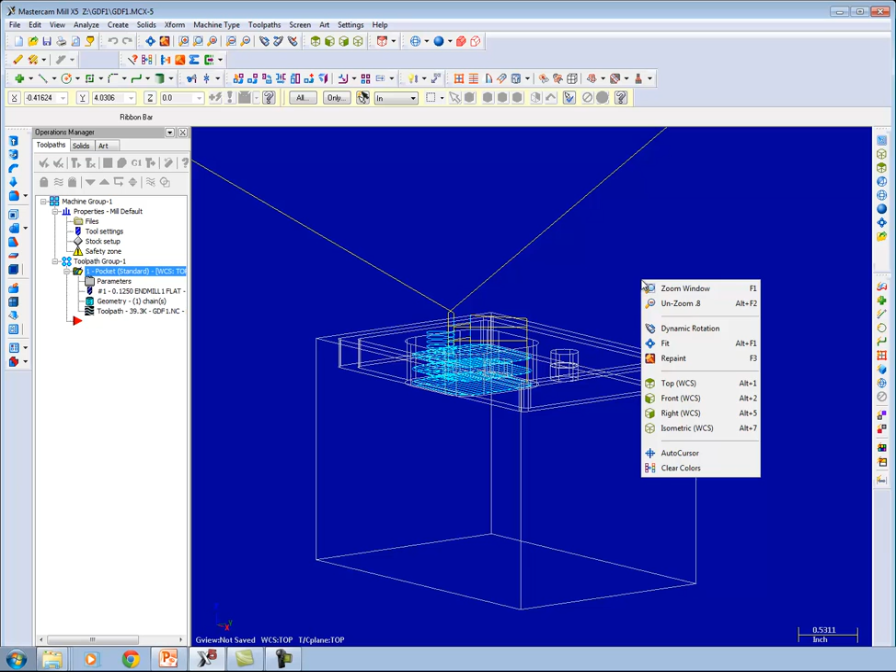Now that we've got our toolpath for our pocket, we can kind of take a look at it in a little more detail. So if I right click and do an isometric, I can see it, and again it comes in from the left, uses the helix to come in, and then does the back and forth with the pocket. It'll end up doing a cleanup step at the end, and then it'll go out toward the back.

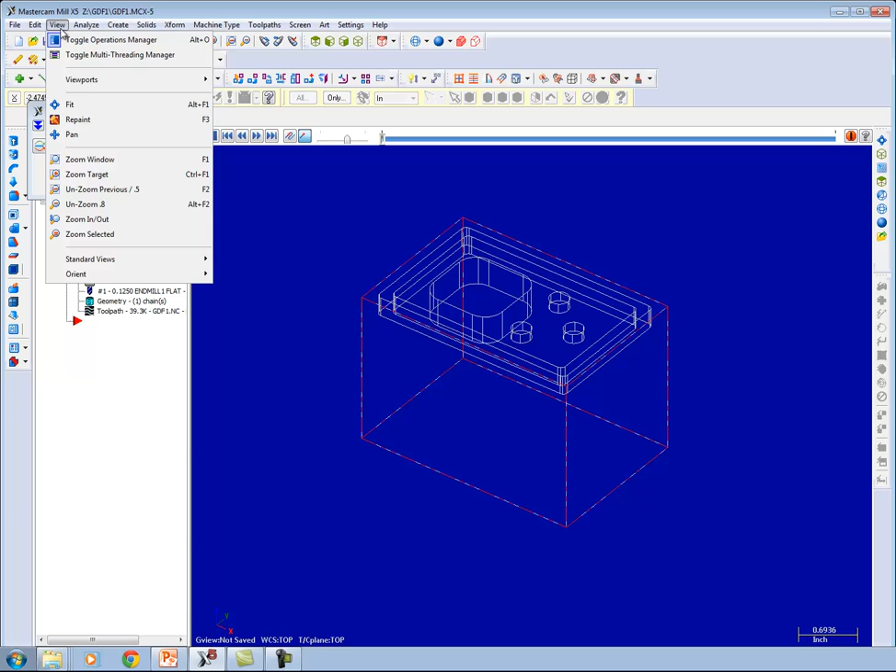Okay, one thing we would do now is do what's called a back plot. So that button is right here, back plot. So when I click that, it's going to give us a little animated cartoon, so to speak, of, oops, that's not what I wanted. What I wanted was pan. I'll put it out over here.

Okay. And when I press the button up here, so these are a lot of choices where then you can see the end mill present, and we're going to choose that for sure. And let's just watch to see what happens. Make it a little smaller. And again, move it out over here. And so let's play the movie.

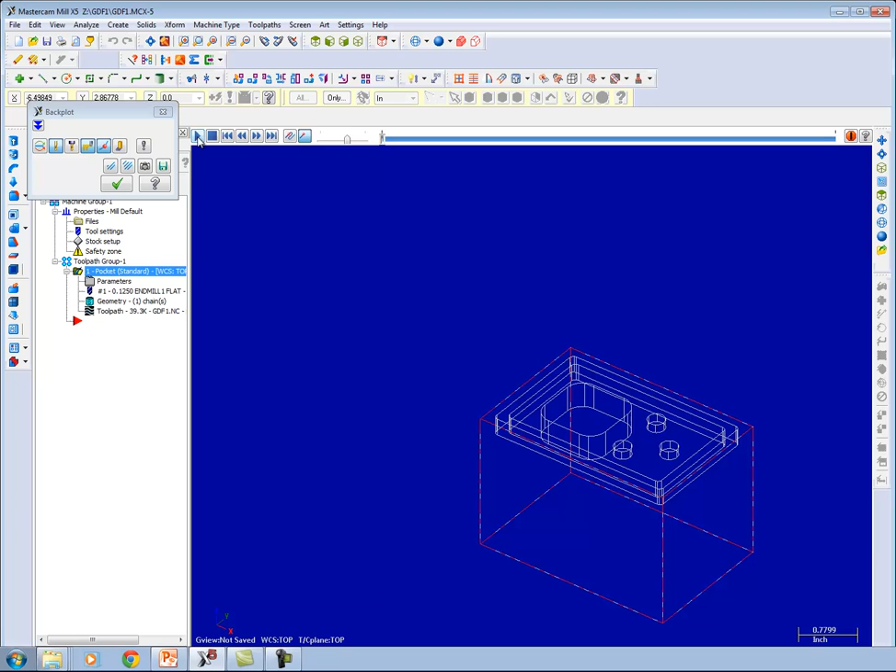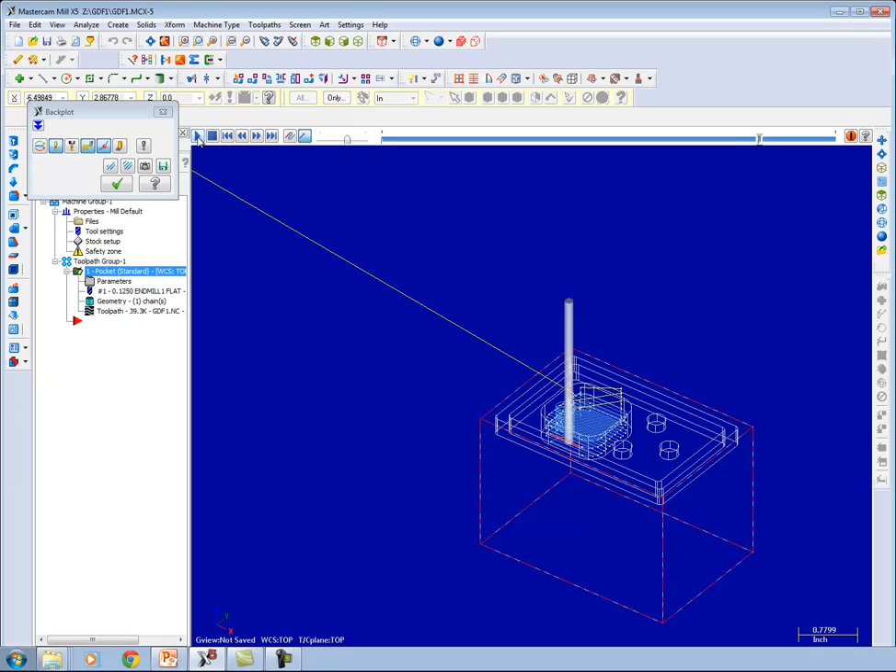And it comes, does its helices back and forth at 1/8 of an inch deep. And it comes out, helices in again. Another 1/8 of an inch. Now we're 2/8, I guess. And finally 3/8. And we come in, and then the final cleanup of the edge, because that edge will be scalloped. And you can see that it looks like this after that back plot.

And if I go, I believe, the top, it should show us that, again, the way we've got things set up, this will help us orient ourselves with respect to the part and also the milling machine. We come in from the left. This was, I believe, -5 at a height of 2, z equals 2. We come in, we take care of business, and then we come out at an x value of 0 and a y value of 5.

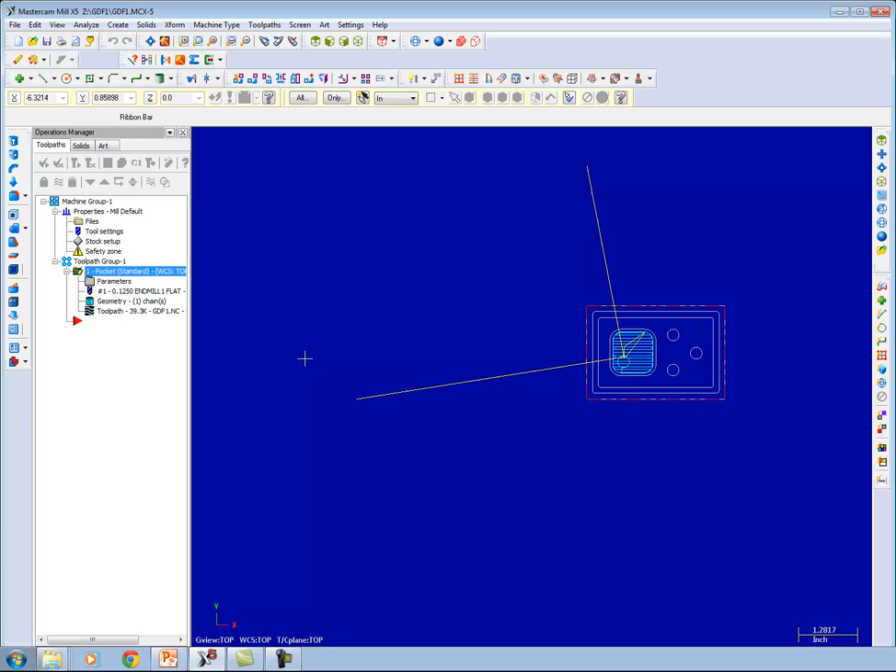Okay. So I think I'm okay. I'm happy with that. So I'm going to right-click isometric. And now I'm going to do the final step, which is called verify. And this is the one that will actually give us, I suppose, the most realistic cartoon. And we always want to do this before we actually take it to the milling machine. So pretty much the defaults will take care of everything.

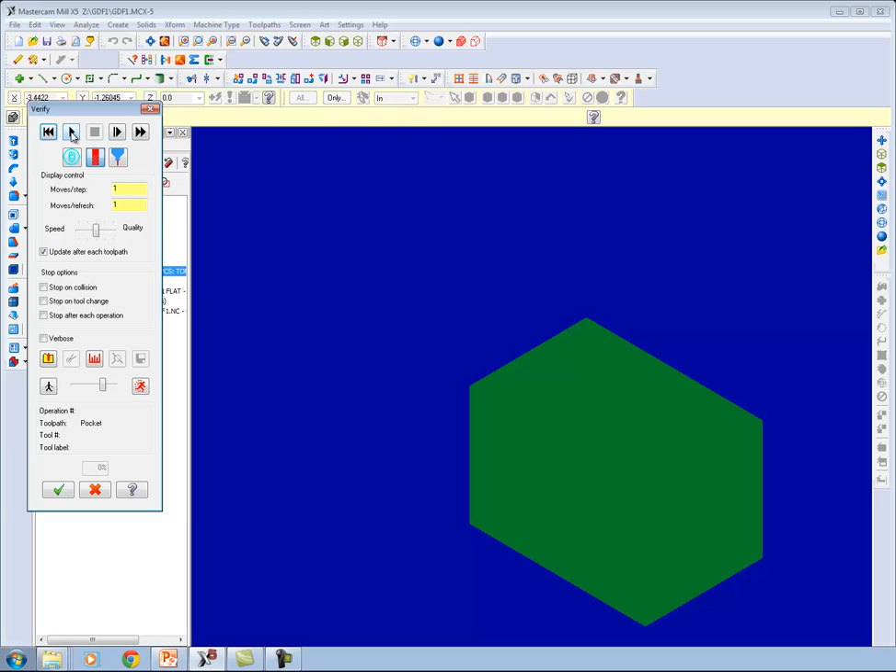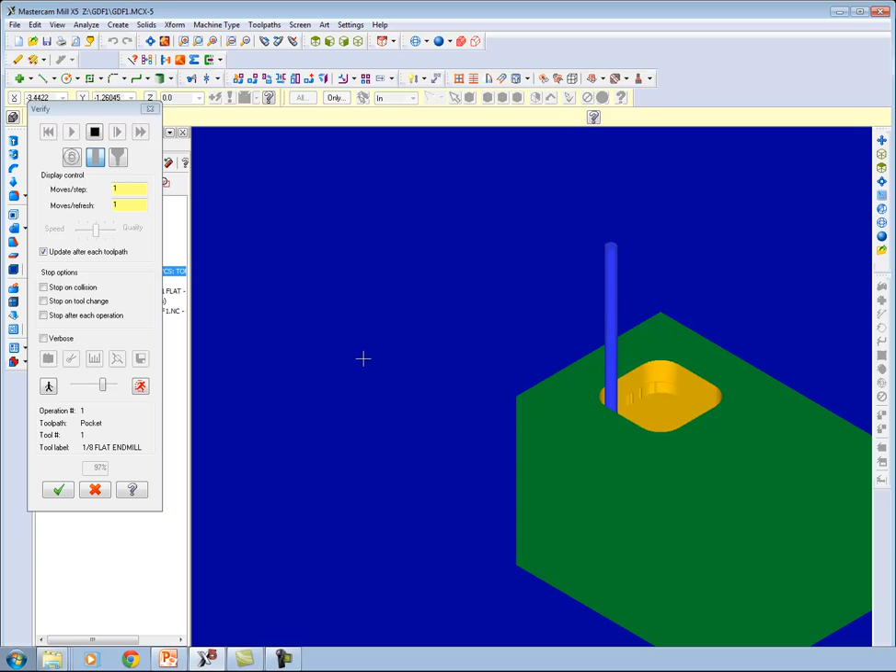So I'm going to click the machine button. So let's watch. So you can see the scallops that are on the side of the pocket, because we're doing it back and forth. So that's what needs to be cleaned up by this subsequent step. There it goes. And how deep that goes in is defined in the parameters. And yeah, so now we can be pretty confident when we take this to the milling machine that it's going to work right. Okay, so I'll end there, or at least click the OK button.

And I think we've finished with the milling of the pockets. We're ready to go. So what we would do at this point is come over here to G1. That's going to post the selected operations. Posting it is a term we'd use. So if I click it, it says, okay, make an NC file, and that's really all we need.

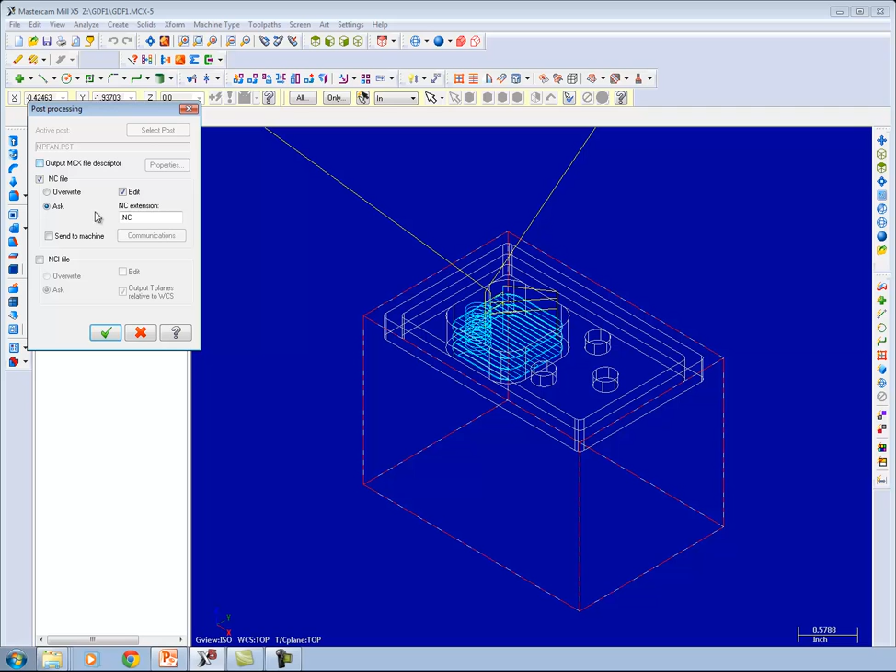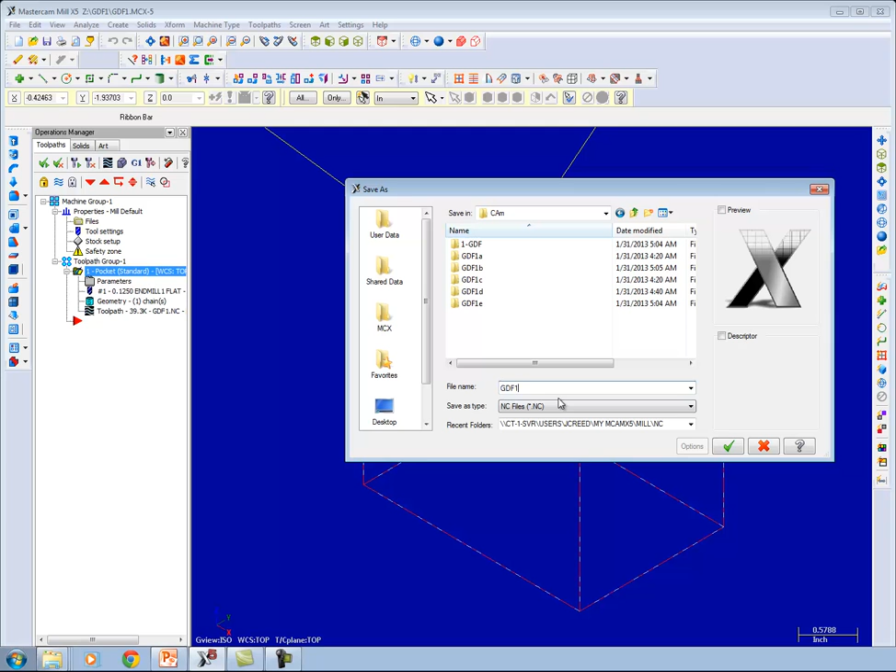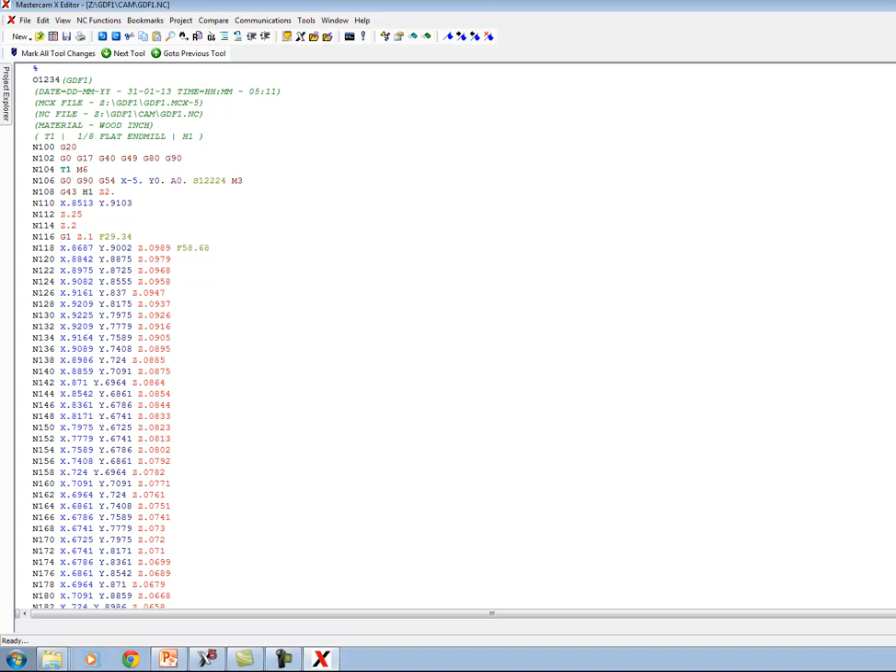So I click that. This asks me where I want to save the NC file, so I'm going to go back to my Z drive. I think that's where we're at. So I'm going to call it GDF1.nc. So say OK, so it's crunching the numbers, and it pops up this window, which is very nice. It's nice and color coded.

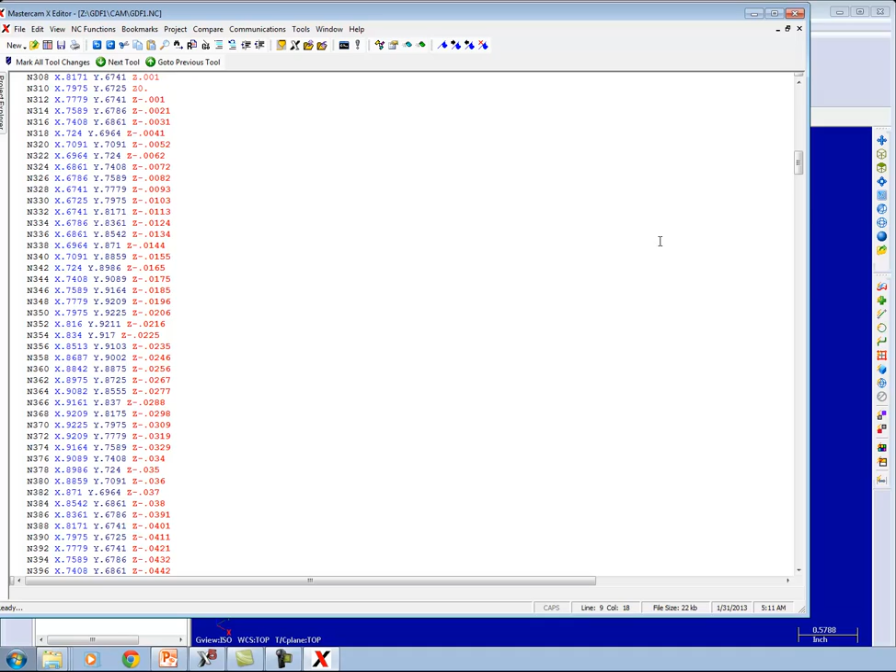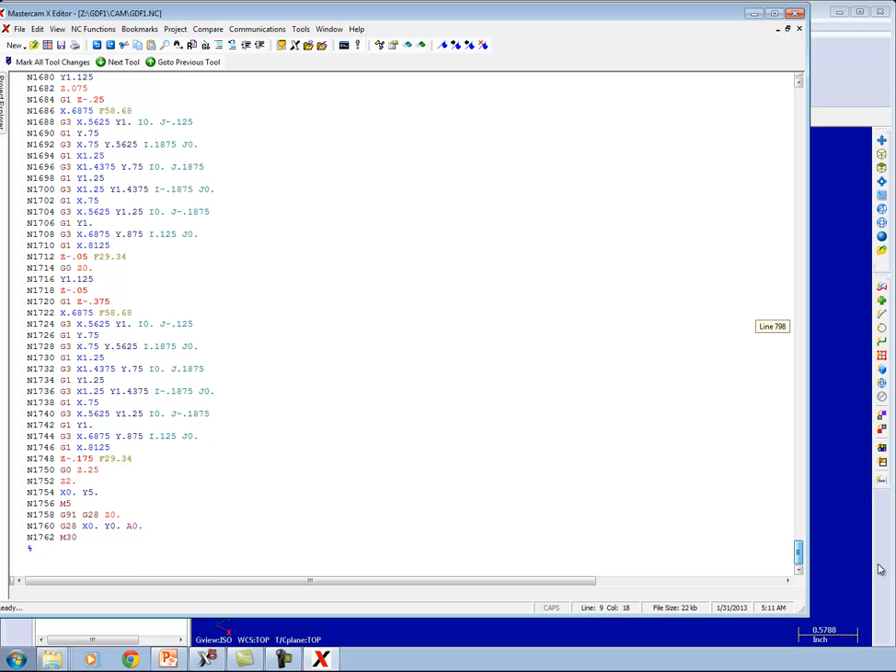So it has our G20. It's got some other commands we don't, strictly speaking, need. And then it just goes down, and you can see that to do that pocket, as we've defined it, how many do we have? 1762 lines, factor of 2, so what is that divided by 2? About 800 lines. That would be fun to code in a notepad, wouldn't it?

And then it's got some of our information here. Green is comments, just like it was over in RobotC. So that's our file. So we'd take this and we'd save it in such a way that we could access it from the machine that's attached to the mill, and we're ready to go.

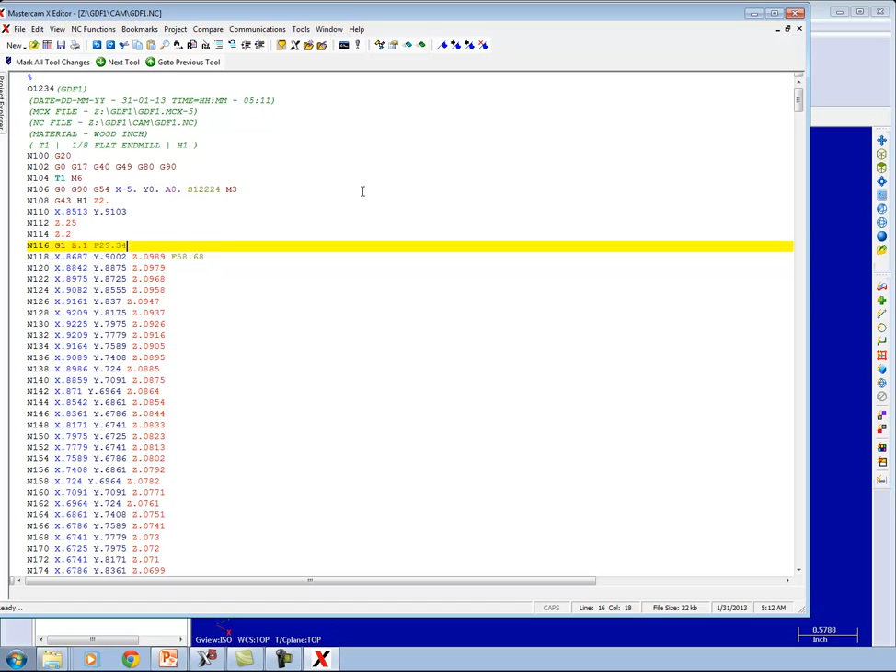Next screencast, we'll take a look at that groove which runs the periphery of the GDF part.